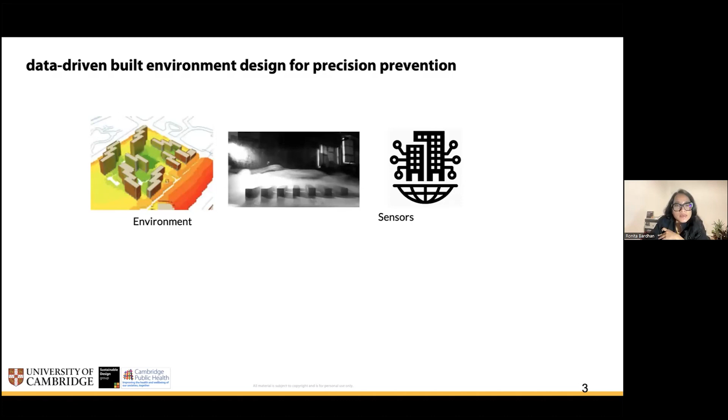If you look at the type of data I work on, I often go along with computational modeling and simulations, also experimental campaigns across the world, installing sensors in different built environments to understand how built environments react with climate and create microclimates, which has direct correlation to health and well-being. I also collect a huge amount of data on social practices, like what does a typical day look like and what happens when a certain type of temperature rises, what do you do on a heat wave day.

On this, I also try to collect data on what is the perception of health risks people face while they face these sort of climate challenges. And I use this to inform the larger goals of sustainability, also in terms of both net zero carbon emissions as well as space efficiency, occupant well-being, and energy efficiency.

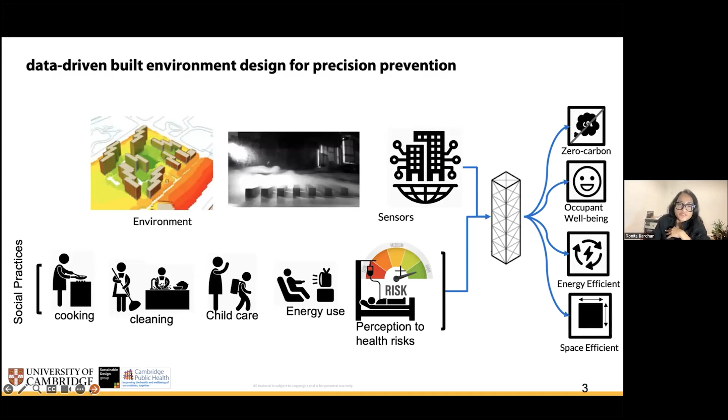So there are two great challenges that we are currently facing in the world. Our world is heating up, and it's going to be more frequent that we face quite hot summers or extreme summers. The second thing happening is there's a huge boom of rapid urbanization in the global south. That means a large number of housing will come up in the coming decades, to the extent that the majority of the housing stock probably doesn't exist yet, and in the next 5 to 10 years we'll see a huge amount of stock come up in these rapidly urbanizing global south cities.

So how do we tackle these two problems together? What are the available solutions, and what do we do to understand the specific context-specific questions that need to be responded to in order to understand what are the heat challenges or health challenges?

So this brings me to the greater challenge. What is this global south divide? The global south, there is this imaginary line that we all are quite aware of, that there's a larger population, primarily in the resource constrained setting in the global south, who will be our future urbanized.

If you look at how the population dynamics have been in these ages, majority of the population in the global south is quite young. So they are going to face quite a large amount of climate change impacts, which will be quite drastic, even for the global north, because there is a large proportion of population who will be at an elderly situation where they would need support to mitigate and adapt to the changing world.

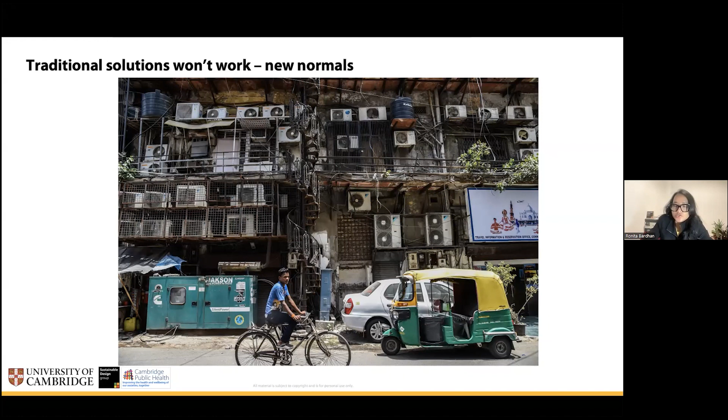Vice versa, a similar situation can be seen in tropical climates, where people, even if they afford an air conditioning unit to cool themselves down, they cannot afford to run that air conditioning unit for significant amount of time, which can mitigate their health impacts.

So there's this context of urbanization tension, this large amount of built environment that will come up in the next decade. Nearly 300 million affordable housing units will be needed by 2030 to accommodate the future urbanization. And so that has a link to the energy burdens and the health burdens.

But the question is, can we use these feedback loops to design built environment in a way that they can mitigate or adapt to the changing environment? So today I'm going to show you examples from different parts of the world, primarily Africa and India, to explain the context of what heat means to different kinds of people, and what sort of solutions are available or can be available for a group of people.

So when we look at urban cities, primarily in these rapidly growing cities, we often find these are unplanned cities. These are cities that have never gone through a formal planning process. That means a large variety or diverse range of different types of built environment come up within a very short spatial span within cities. We can see in the image on the left hand side that there is extreme high rise, and then there are extreme high density compact high rise buildings, and then there are high density compact low rise buildings.

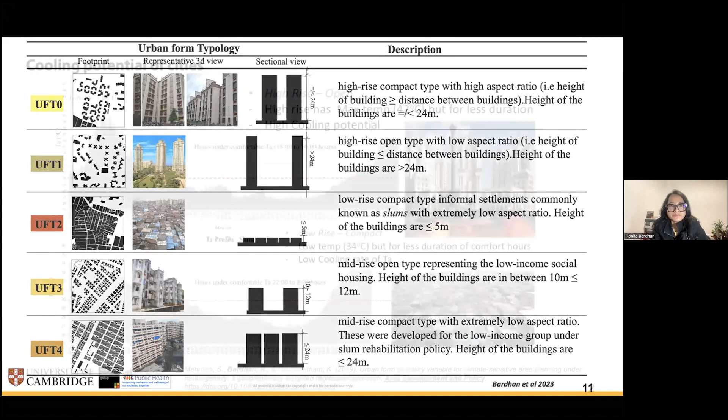So we installed a huge amount of sensors across the city to understand different sorts of environments, to understand how fast a particular form cools down. So you see in this case, I'll try to use my laser pointer so it's easier.

In this sort of case, which was extreme high rise, but the distance between the buildings was quite high, we found that the temperature during midday, around 2 o'clock, reaches quite high - this is annual average. On a particular daily basis, it can go even higher. So it reaches quite high, around 42 degrees, but it cools down favorably faster, and then it remains cooler.

So any gray part which is below the red line is more comfortable. So people will tend to open their doors and windows and not switch on any sort of energy-intensive active cooling devices to cool themselves down.

So we did find, although it heats up quite fast, it cools down quite faster. Also, it stays cooler for a longer time, from 6 o'clock in the evening to 10 o'clock in the morning. And then again, the cooling-heating process starts as the day progresses.

However, there was another form which didn't heat up to a very large extent, but it took a long time to cool down, so much so that the only thermally comfortable hours were between 10 o'clock at night to 8 o'clock in the morning.

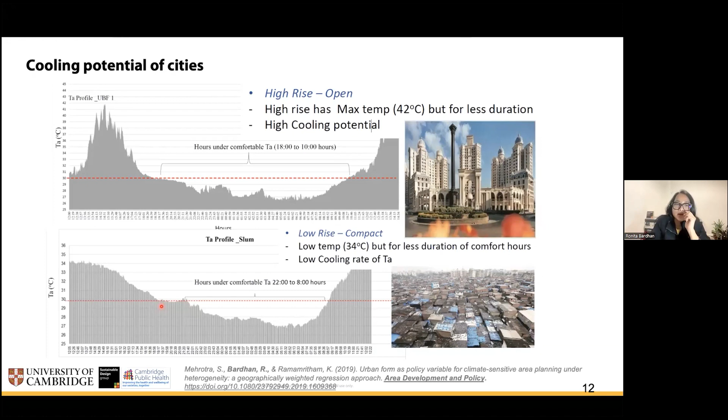So moving forward, we tried to understand if there is a particular form which has a higher relative risk from heat. And we did find that there was one form which had extreme high relative risk from heat, and we wanted to see whether this form is one of a kind within a city, or is it quite frequently available in a particular growing city, and is there a mitigation option that we can see.

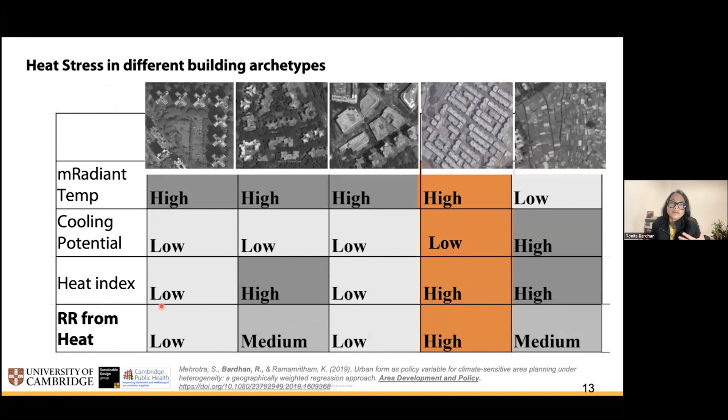So we started exploring more and more, and what we found out is that typically this form has very unique building bylaws - this form has special purpose bylaws in order to build it, because they have an aberration from the National Building Code, which says that the distance between the buildings should follow this 45-degree line. That just means there is ample distance between the buildings to allow for natural ventilation and daylight. For high-rise buildings, the angle can be a little bit steeper, up to 63 degrees.

However, for these high-rise affordable housing, the angle is extremely steeper, to the extent that only minimum distance between the buildings is prescribed, which is said to be 3 meters. So what happens when a recommendation guideline says minimum distance between buildings should be 3 meters, you often get that distance as the minimum threshold. You don't get it beyond that.

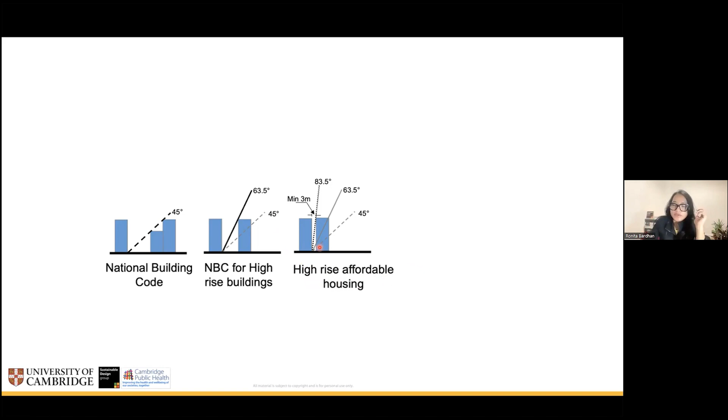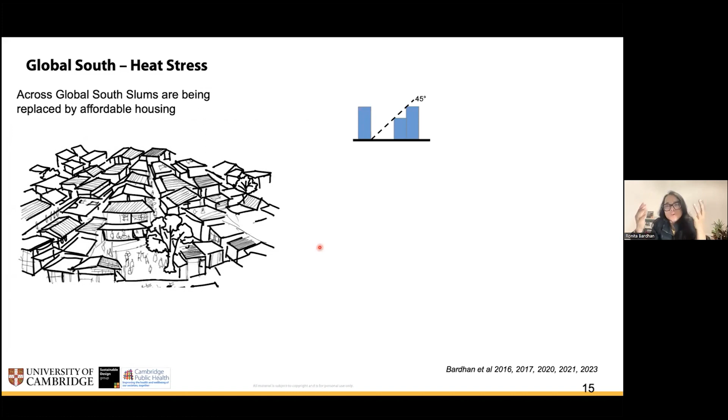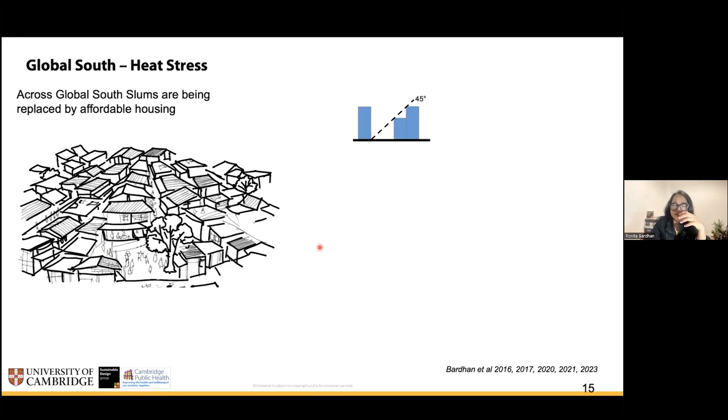Converting this into the current logic of policy space, the question is how does this form exist, and what is the history of this form existing in a particular setting. Most global south cities are going through a transformation and transition from what we call low-rise, typically known as slums - I don't like to use that word for lack of a clearer one, but I'm using it for now. What they are doing is replacing these slums with high-rise units that are very closely packed together, creating hyper-dense situations where these building codes play an important role.

We went into these sort of communities and tried to see what is the health and energy burden in these communities. We did a lot of experimental campaigns, and I'm going to show you how it works.

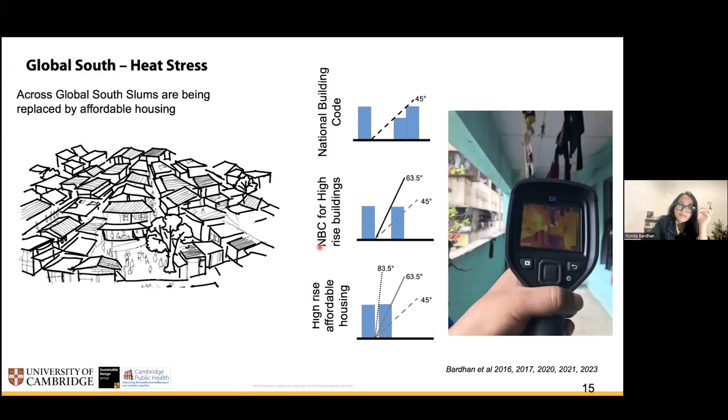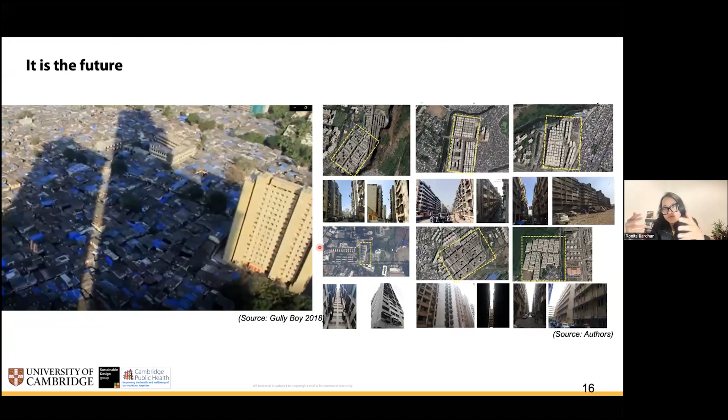Most cities, if you look at the frequency of these forms coming up rapidly, replace the low-rise, extremely dense situations often known as slums in the global south with these high towers, mushrooming across the city in very large numbers - so much so that in Mumbai, typically 50 to 55% of the population lives in slum or slum-like settlements. They would be the first participants in this program, shifting from slums to these high-rise towers. How does this look in terms of design?

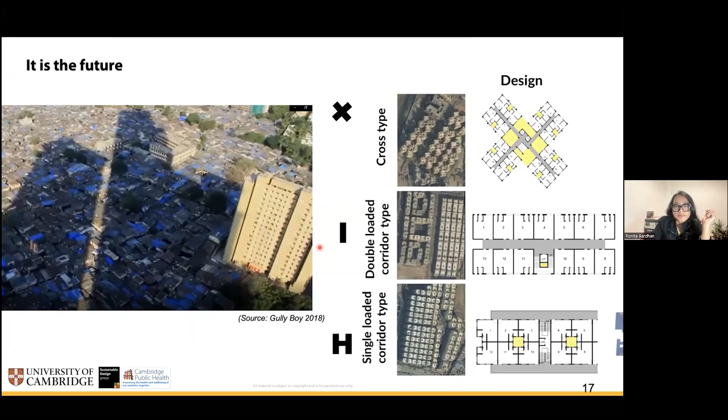As a mental map, keep in mind there are 3 different forms available across the city to be built. The X type has a central core with lifts and staircase, and 4 different wings where the apartment units are. The second type is the I type, the simple double-loaded corridor seen across the world in affordable housing. There's another unique form called the H type, where the corridor runs at the periphery of the units, meaning the units don't have direct access to outside - any access is through the corridor running along the perimeter of the building. Remember X, I, and H type, and you'll see how they play in terms of burdens.

We started looking at the heat burden of these buildings in comparison to their counterparts, which are the horizontal slums. We wanted to see if these buildings, being built as a replacement of slums or low-income habitats, perform better than what they originally were.

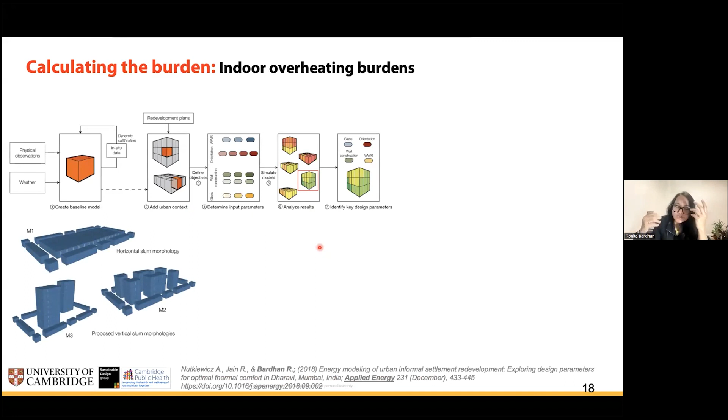We did find there are 2 different broad forms - M2 and M3, where M2 has some sort of community design or communal layout within the space, whereas M3 is tower blocks, which we've seen across the world coming up in the 1960s and 70s during the post-industrialization phase. We found the M2 form had a higher number of compliant days, meaning people might not need to switch on energy-intensive cooling devices to mitigate thermal stress.

We could also find out which floors become extremely challenging to live in. If you're living on the top floor or near the top, those are much more desirable. However, if you're living on the bottom floors, typically up to the first and second floor, especially in months of extreme heat, they become the most sufferers. So there's an inequity or asymmetry in health burdens just within a particular building, which scales up when the community design doesn't respond to these heat burdens and creates more channels of heat trapping.

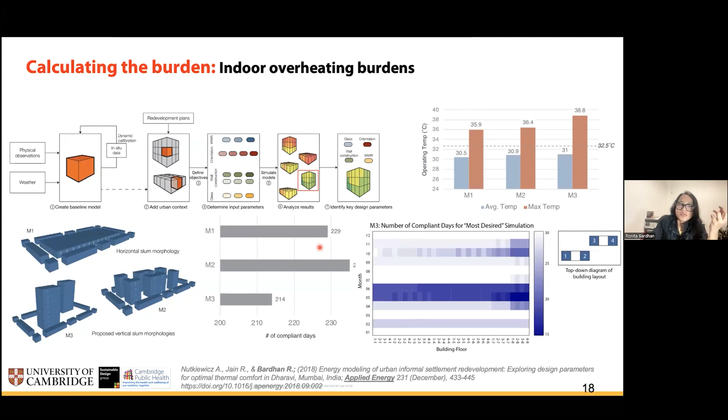We wanted to understand the indoor heat burden or heat stress in different forms of buildings. So we did a thermographic study on a hot summer day in March, where the outside temperature averaged 30 degrees, but the external wall temperature itself was 38. You can imagine that because of normal convective processes, indoor temperatures will be extremely higher unless there are options for mitigating it through natural ventilation, aided ventilation through a fan, or an energy-intensive cooling device like an air conditioning unit.

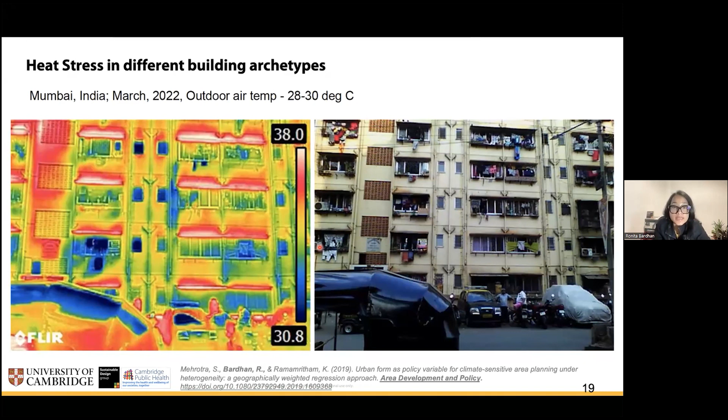It's not yet extreme winter here, so we are not wearing jackets, but if you turn around a jacket and see the label, there's a value written, like 90% down or 0.9 CLO, which says how much insulation you get. Typically, summer clothing should be within a range of 0 to 0.5 CLO, 0 being a naked body and 0.5 being very thermal summer clothing, whereas winter clothing is around 1 CLO.

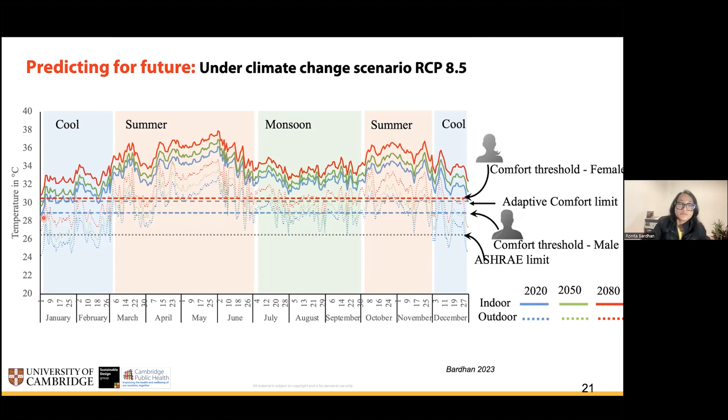So I'm going to play a small clip, and just let me know if the clip sound is visible, or probably I need to go and change the setting.

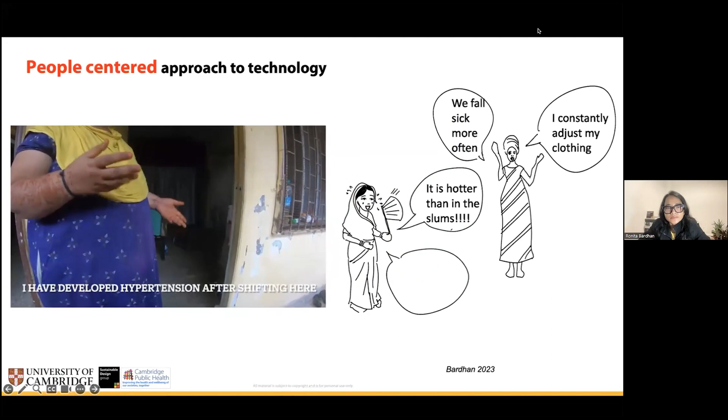So we did an extensive survey in Ethiopia and India, and I'll share the film later on, where we interviewed women from Ethiopia in Africa and in Mumbai, India, who have been shifted from these slums to high-rise buildings. It's a honeymoon phase, because they now have a tenured apartment unit in one of the costliest cities of the global south. So it's a huge upliftment for them.

They have a toilet inside the homes, so it's a wonderful aspect of their life being uplifted from where they were. But when we ask them what it means to them living in these houses, has their health burden increased, has their medical bills increased, and is there something these houses are not corresponding to, we had an immense amount of data from transcripts from these communities.

While we were taking this, we also ran a lot of experimental campaigns to know the exact value of their temperature threshold.

We did find these common things coming up, that they are falling sick much more often, they have high electricity bills because the indoors are extremely dark - you can guess this is probably the H type, because the light is almost compromised due to the corridor. Also, because of privacy concerns and socio-cultural customs that women should not be visible to strangers directly from outside, all of this combines to restrict the airflow within the house, which adds to this health burden.

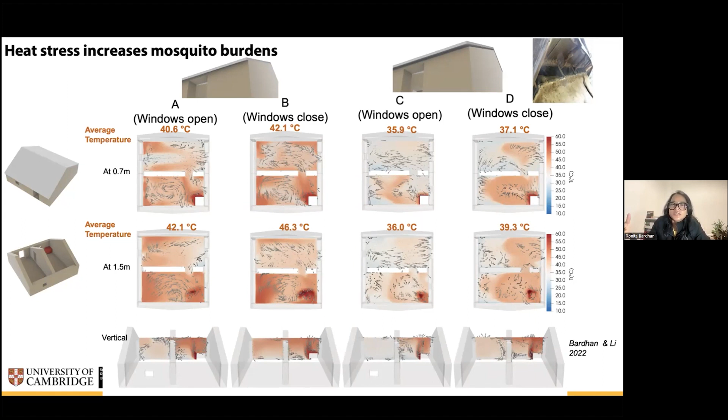With climate change, on an extreme heat day, temperatures can rise up to 46 degrees. We did a huge campaign to understand what sort of temperatures are there, and now we have images from a large number of units showing surface temperatures reaching as high as 72 degrees on a hot summer day, meaning the indoor temperature will be extremely higher.

So we started looking at whether there's a low-cost intervention that can reduce the pollution burden and also reduce the heat burden. We found that if people just open the windows while cooking, you can reduce the pollution burden significantly, from around 1600 micrograms per meter cube to around 1000, which is still higher because the World Health Organization limits it to 50 micrograms per meter cube in a cooking area. On an annual average, it's around 900, because the ambient pollution is also very high.

We also found that combining open windows with partitioning the cooking zone and adding a HEPA filter to increase the air exchange rate can reduce pollution by nearly 94%. But windows have a different cultural meaning in different contexts, not just thermal comfort control. So what if we just install an extract fan? That alone can reduce it by nearly 98%, without much investment.

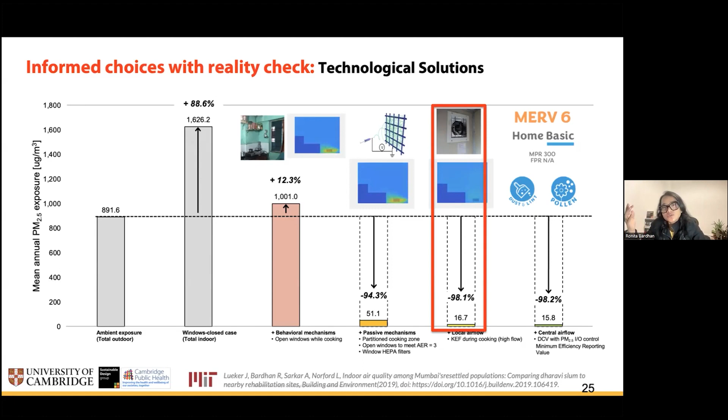Most of these houses are built by the government, so it's just one addition to these units that can reduce the burden significantly. We then looked at people who had personally invested in installing these extract fans to see how it looks in reality. Because there was no space available on the wall, they had to close the majority of the window in order to install the extract fan, and for the extract fan to work properly.

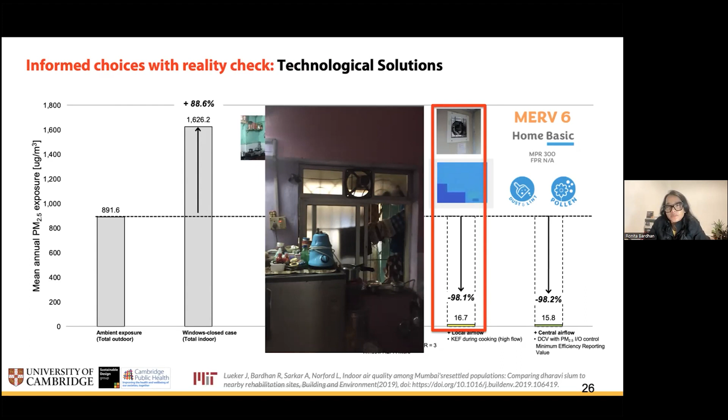If the windows are open and the extract fan is also on the window, the pressure difference might not be created to drive pollution from inside to outside, and sometimes a reverse action might take place. That's concerning, because the extract fan installed by people might not actually serve the purpose for which it was installed. So then we looked a little bit higher.

This was on respiratory disease. We looked at tuberculosis burden, because this is a highly concerning issue in the global south. Respiratory diseases, particularly tuberculosis, have very high prevalence in these communities. We wanted to see if there's a particular design that registers a lesser incidence or prevalence of tuberculosis, and found that the X-type reported had very high daylight.

Anytime you see orange or yellow in the image, those are areas in the apartment receiving daylight. Anything shown in blue in the daylight column means that portion of the room is not receiving any daylight. This is so evident in the H-type, where only the corridors receive direct daylight, and diffusion doesn't happen much within the windows or within the interior apartments.

We saw a similar thing with the film, where the woman was standing right outside their door at around 11 o'clock in the morning, in this sort of house with no daylight inside the room. It was quite dark, and air velocities were poor in the H type. We found high prevalence of tuberculosis in these houses, H type, where people who had lived there for a significant amount of time, 4 to 6 years, had these incidences. Whereas people who reported tuberculosis in the X type had developed it within 6 months to 1 year after shifting, which might suggest they already had tuberculosis before moving. So it was probably not a factor of the built environment contributing to the incidence.

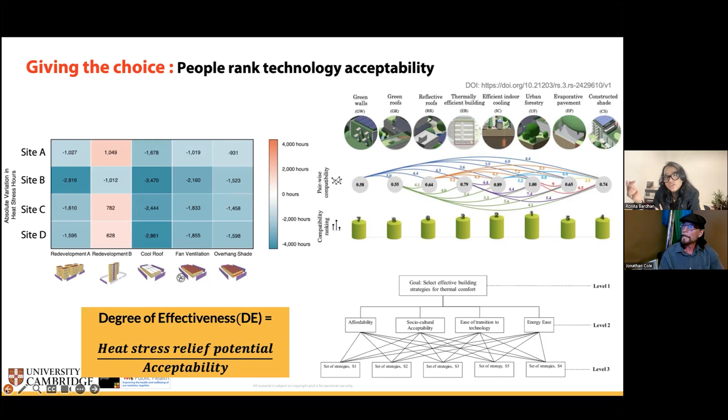So they have this. It becomes very powerful when we put the data into these accessible forms. And that's what I wanted to emphasize, that when we were also looking at these green walls, green roofs, and this plethora of technologies for cooling cities, it's not just about whether they are implementable in a city. That's one thing, a physical factor that comes in, but also, are they even acceptable?

Like green roofs, fantastic, but they are not acceptable because people don't want to participate in the whole process of managing it while they're living in these sort of houses. There's lots of, in a tropical country, it can breed a lot of insects, it can cause a lot more in terms of managing the green roof to the level that it can mitigate. So these are a lot of challenges.

So as advocacy, we can say, oh, let's do all the city as green roof, and then you come back and people say, oh, I use the roof as my economic generation, I'm not going to give it to you. And how much energy bills are you going to get me down? Say just a few pounds or a few dollars, and I can earn that within just three times I lend my roof for a party. And this is very real, and this is very physical, in the sense that if policymakers do not take into account the acceptability, we often have wonderful technological solutions and they don't get implemented because the community doesn't allow for that sort of activity.

Whereas if you just go and ask them—we did a film where we asked, if you were to redesign your community, what sort of technologies would you use? There is a plethora of local, cultural, traditional technologies embedded within these societies, and we do not have enough data for that. Why don't we first go and collect the data, understand what their lived experiences have been?

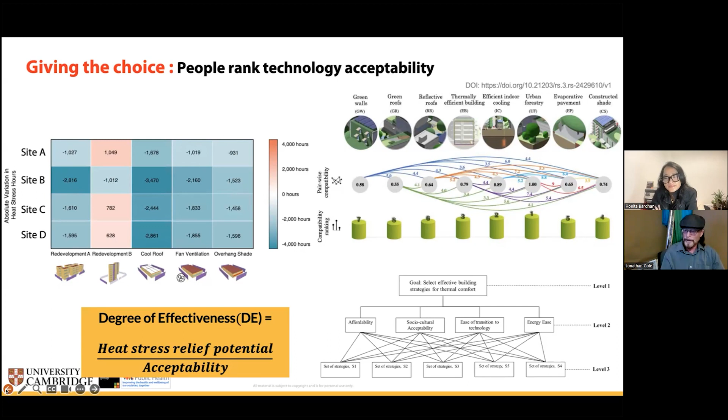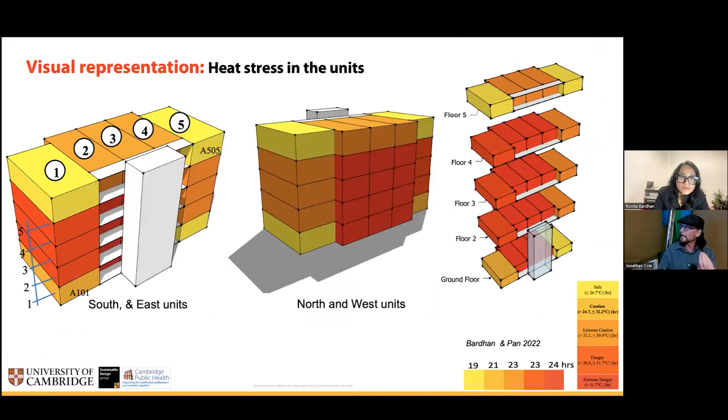So by compliant day, we defined it as maintaining a temperature around 30 degrees indoors—so it is complying to the days. It's not exact, because thermal comfort is so different across the world. If you ask somebody in the UK what is thermally comfortable, air conditioning companies have made us believe we're all comfortable at 26.6 degrees. Whereas when we did extensive surveys in the global south, we found 28 to 30 degrees is still comfortable for them, because of their thermal history and how they've been living. So more compliant days just means people will not feel thermally uncomfortable to the level that they switch into some energy-intensive device. That's where compliant comes in.

But these are all simulation works and need to be extremely validated. So that's why we did further work to understand at what temperature people switch on active energy. People would prefer active energy, but due to different reasons of agency and social cultural practices, do not have access to it.

We have also found women who are literally sitting in a room with a ceiling fan and an air conditioning unit, but say they don't want to switch it on when they're alone in the room, because they spend the majority of their time indoors and the burden of a high electricity bill will fall on them. So they only switch it on when there are men or children in the room. That's a unique situation.

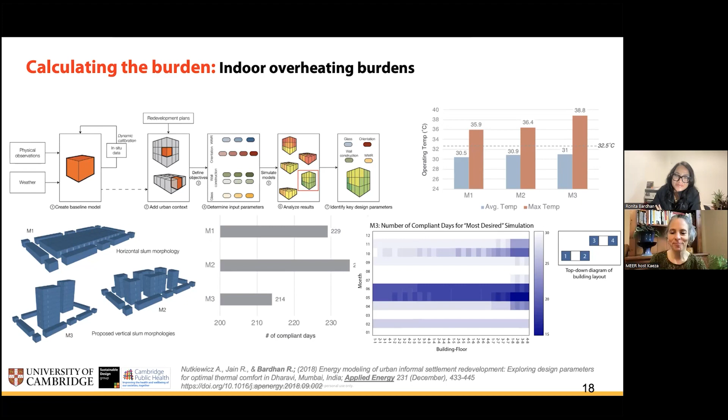Well, that leads me to it - it's also intricate in terms of what you need to take into consideration. And it's fascinating that the women found out, 'oh, look how much we're cooking.' Just that fact by being presented with it. Is your sense that urban planners have their eyes on any of this gender stuff? Is it even on their radar screen?

I don't think so, because we don't capture that sort of data. Urban planners work with average population data. So for every 5,000 households, they have to provide a PHC, a primary healthcare facility, and they work with that. They don't see the spatiality of the genderedness of that data. So if there are more females, more elderly females, the burden on that PHC would be extremely high. That's why I say factor in gender into all your data in a way that makes the burden much more visible.

So we collect the data, but we often collect it as a demographic and forget about it when making decision-making processes. We still make decisions on household income, which is great, because that's one of the biggest factors in deciding any sort of transition. But there are also agencies within communities that can be implemented by just looking at the diversity of the data in terms of whom we are catering to.